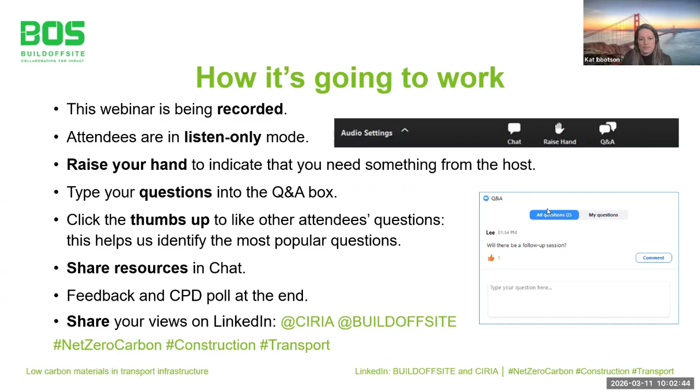Also, a little bit more about CIRIA. For those who aren't fully aware, we recently celebrated our 60th anniversary as a not-for-profit member-based organisation. Our core strength in terms of CIRIA has always been about improving performance through collaboration in the built environment and construction sectors. We do this by delivering independent guidance, such as the Sustainable Urban Drainage Manual, the Rock Manual, International Levee Handbook, Asbestos and Biodiversity Net Gain. CIRIA organises around 30 events per year, mostly online at present, but they range from topical conferences, annual debates and lectures to webinars such as this.

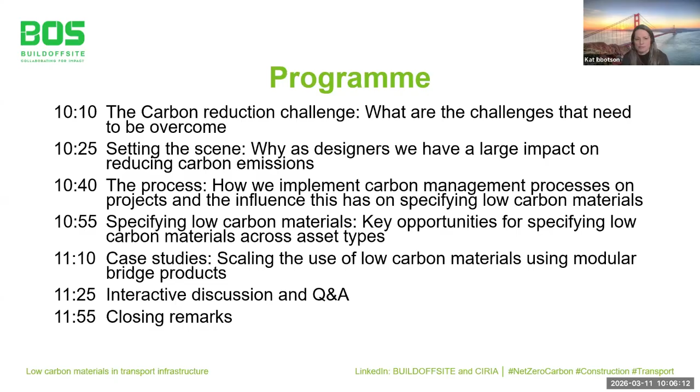Now, our speakers today include Steve Elderkin, who's Director of Environment Sustainability at National Highways, James Kraven, Road Senior Engineer at WSP, Joe Lewington, Chief Environment and Sustainability Officer at Network Rail, Graham Jones, Managing Director at CPro Systems, and Musa Chung, Technology and Innovation Principal Engineer at Laing O'Rourke.

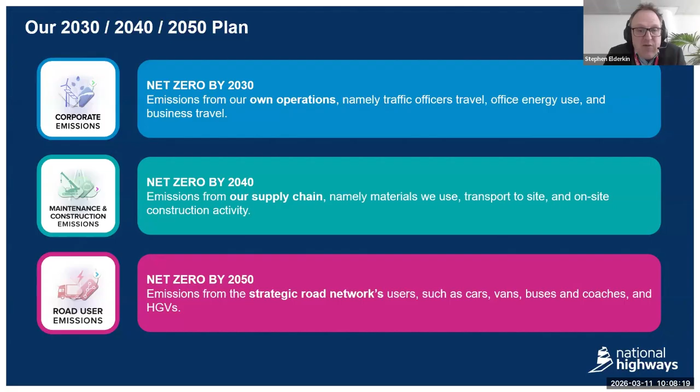Almost 5 years ago, we published our net zero plan in July 2021, and that has 3 headline targets. The first is that we will get to net zero for our own corporate emissions by 2030, which feels quite close now. Second, we'll get to net zero for our construction and maintenance emissions by 2040. Then we would get to net zero for our road user emissions by 2050.

There's a lot going on across the company and across the wider sector, and we very much see ourselves as an important part of this, setting the direction as the client and the infrastructure owner. But this is about changing a system that consists of designers, contractors, material producers, as well as how we operate and maintain the network. We've been making good progress across all 3 targets.

By the end of last financial year, we were down by 70% in terms of our corporate emissions. That's the offices and estates, our depots, our own 1,300 vehicles that occupy the network, that operate and maintain the network. We think that will be getting close to 75% by the end of this year. So we are making good strides towards that 2030 target.

Things we're doing: we've transitioned almost all of our light fleet now to plug-in or hybrid electric vehicles. They will all be moving to fully electric vehicles by that 2030 target date. We've been changing an awful lot of light bulbs. That's actually quite a big project, and we'll be getting towards 70% of our lights being low energy light bulbs by 2027.

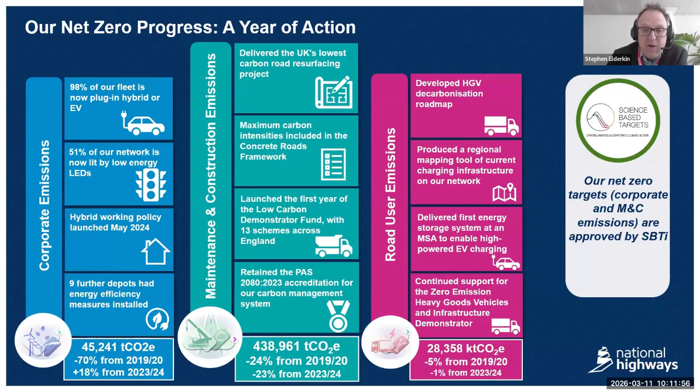So some of the challenges for construction and maintenance emissions in particular: roughly 2/3 of our construction and maintenance emissions are embedded in the materials that we use, and that's very much dominated by the steel, the concrete and the asphalt that's used in the construction and maintenance of our roads.

So we need to work in partnership with those specifying the materials, those manufacturing the materials. We need our standards to allow innovative lower carbon materials and additives to be used on our schemes, and so there's a responsibility for us as the holder of the design manual for roads and bridges, a set of standards used by more than 100 countries around the world, to be agile and to be adapting those to the innovations that are happening.

The performance of the sector will be decided by decisions that are taken throughout the system. So there's a big piece around levelling up people's understanding and awareness of carbon, the opportunities that exist for reducing carbon, and getting thought of carbon into decision making at every level. And we're obviously reliant on supportive policy, regulation and funding from government, who hold some really important levers in this area.

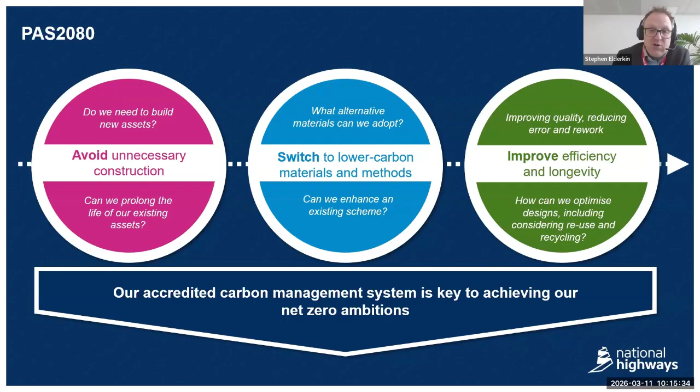And then durability is also important. So if you can extend the life of the pavement, the asphalt, then that's a really sound way of both delivering cost savings as well as carbon savings. It will also, of course, require some innovation around the materials that people are using.

PAS 2080 isn't just for us, and we see it as a key enabler of us being able to have confidence in the decisions that are being taken throughout the system, that the data being reported between our suppliers and ourselves is accurate, that all of our supply chain are either accredited to PAS 2080, or if they are a smaller supplier, that they've aligned to the principles.

We set out in our 2021 net zero plan that we would require all of our supply chain to get PAS 2080 accreditation. And happy to say that now 86% are on the way there, and we're obviously engaging with the 14% who are not as yet making progress.

It is now going to be part of our tenders and our contracting, where you will be disadvantaged as a supplier if you do not have evidence of either having or working towards getting PAS 2080 in your company.

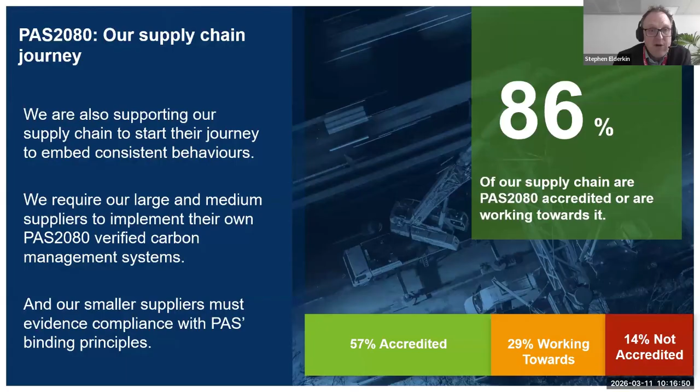We've recently updated our standards to make them more outcome based, to permit the use of more concrete additives that are lower carbon substitutes for higher carbon clinker. We are also changing things like the length of time that you're allowed for the concrete to reach strength. Again, all of this makes it more flexible, more open to the specification of lower carbon materials and mixes.

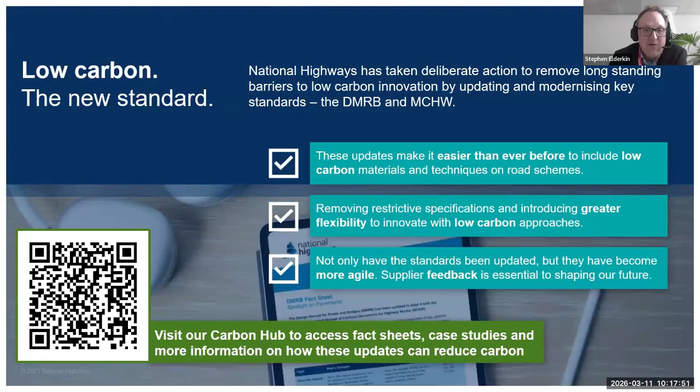And we are open to feedback and the use of our departure system to gather information about other ways that our supply chain want to adapt the materials they're using and to reduce carbon. And so we are compressing the amount of time that it takes to take materials through to being used on our sites at scale.

Transparency, sharing, learning. We set up a carbon hub. More than 1,000 of our suppliers have used this and accessed this. We've made available all of our carbon management system documentation. We've curated a set of resources around low carbon construction.

All of the recording of our own webinars and so on are put up there, and it's all about this idea that actually, just as for safety, where it's too important that we are safe, it's too important that we're reducing carbon to try and make any commercial advantage out of this. If we've got something that works, we want to share it, we want to see it adopted across the sector.

And so we've urged our suppliers to take a similar approach to that they have done with safety, to share what they've learned. And we have a low carbon opportunities register, which has a whole set of opportunities already implemented on some of our projects, so they raise awareness that these opportunities are available, and we require, as our projects are taken through their design and development, that they consider the applicability of these opportunities to their schemes.

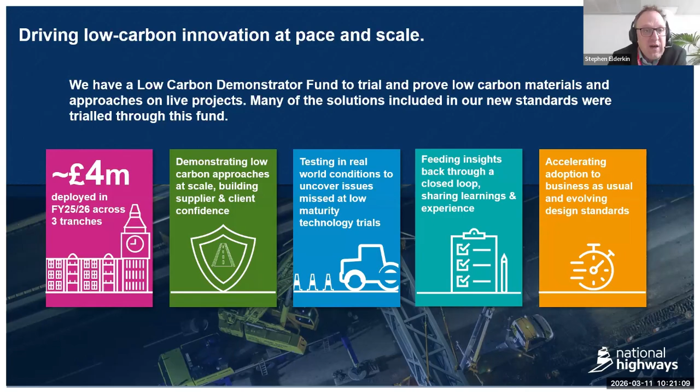We've been using the Low Carbon Demonstrator Fund to fund projects across our network, mostly around asphalt and resurfacing, but we've also been funding plant machinery, concrete, and other ways of reducing carbon on our projects. This gives us learning in the real world about any of the challenges these changes present.

Focus areas: two-thirds of our emissions are from materials, so we need to focus there. We must take a whole life approach, so it's no good saving a bit of carbon in construction if it doesn't last and we have to replace it sooner.

We're looking at things like echelon paving and different ways of delivering surfacing to reduce the number of joints and improve durability. And particularly on trailblazing sites like the Lower Thames Crossing, our biggest project, we're testing the use of electric and hydrogen plant at scale.

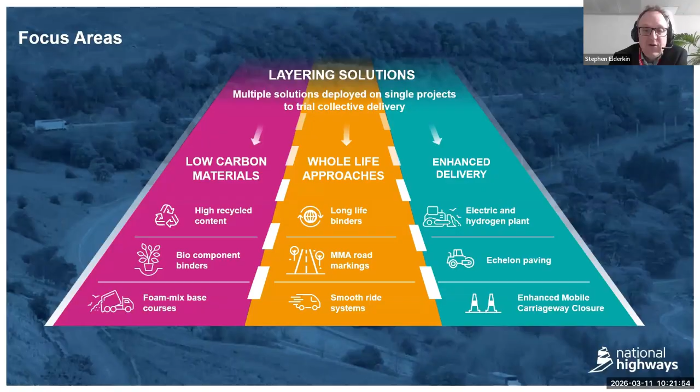An example of one of the Low Carbon Demonstrator Fund projects is a resurfacing project on the A47. Here they used foamed asphalt for the binder course with high levels of recycled content. All the plant and machinery was electric rather than diesel. In total, just on that one project, it saved 600 tons of carbon dioxide.

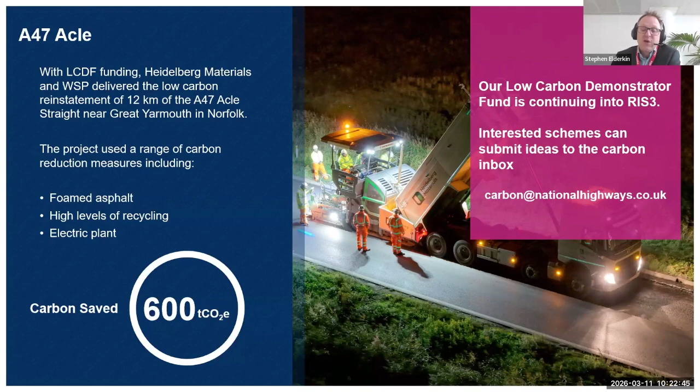This is just one example. We had another project on the A64, run by a different supplier, that achieved more than a 70% reduction as well. So we are starting to demonstrate really deep reductions in terms of surfacing emissions.

Thank you. Hopefully that gives a bit of an overview of the activity happening at National Highways. Happy to pass back to you, Kat.

Right, that's great, Steve. I think it's a real demonstration in terms of the impact a client can have and all of the different layers of approaches that are needed to make an impact. So thank you for your presentation today.

So let's begin with our next presentation by James Kraven, Road Senior Engineer at WSP, who will be setting the scene on why, as designers, we have a large impact on reducing carbon emissions. Over to you, James. Morning everyone.

So as mentioned, I'm James Kraven, Senior Engineer in the Roads team at WSP. I also sit as the Roads Community of Practice Decarbonisation Lead, leading on quite nicely from Stephen's presentation. I've also been leading on our carbon management across the National Highways SDF framework, so I've got direct hands-on experience of working through what Stephen's been discussing.

So to start off, I wanted to run through at a high level how much influence we as designers actually have on the carbon emissions within our projects. As alluded to earlier with the hierarchy and ability to influence whole life carbon, that ability greatly reduces the more mature a project gets. So we really want to be getting involved as early as possible to have the biggest influence that we can.

Within conceptual design, we look into the different design options we have. As we go through design level assessments, we want to look into how we can change key aspects of design to construct less, so avoiding construction activities, and use that to help influence decision making when the option is selected.

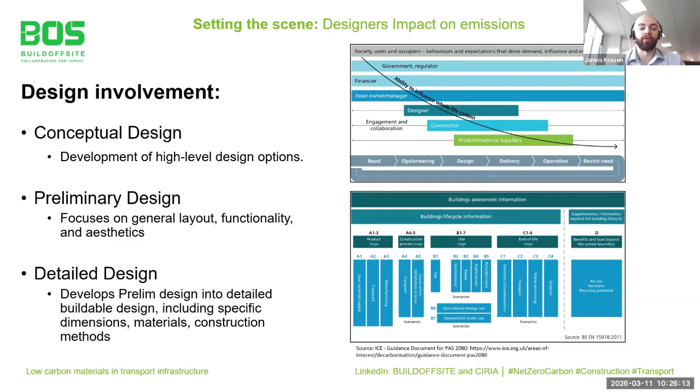As designers, we will set out a baseline at the start of the project. So we look at what the carbon emissions are within the project before we've looked at any measures to reduce them. This is really important because it lets us hotspot the carbon emissions, see where the highest amount of emissions are sitting within the project, so we know exactly the key items that need to be tackled.

Following on from this, we go into a quantification stage of suggesting new low carbon opportunities that we can implement onto the project, having discussions with the contractors, suppliers and the client, and ensuring they are practicable and can be implemented. Then we look into what the effects of this actually are - it's all well and good saying we're going to use a low carbon material, but until we've proved the savings we can get, it's difficult to justify the improvements.

And then out the back of that, we really want to be reporting this through the whole value chain, making sure everyone's aware of what's gone into the processes and how we are managing the carbon, and making sure we have a continuous improvement loop, where if good work's being done on a project, we want to be showing that off to other projects, making it clear these innovations can be taken further and used for more widespread carbon reduction changes.

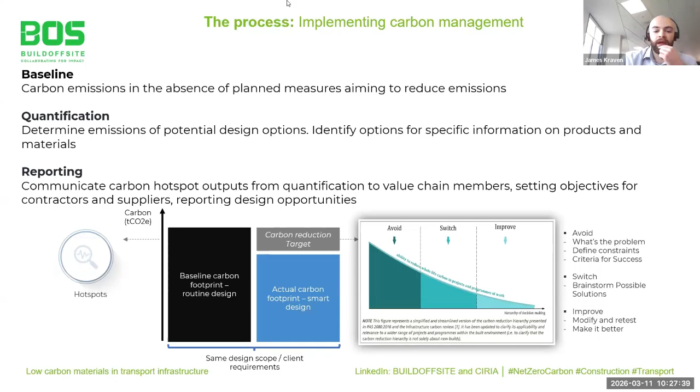As was discussed earlier, the carbon hierarchy is one of the key guidance documents for how to manage carbon and try to reduce it as much as possible. So the avoid action is key, because the biggest influence we can have on reducing carbon is by building less. If we're building less, there's less carbon going into it.

It's about trying to change thinking away from a lot of the time people think, oh, we need to use this new innovative technique or new material. But quite often, the biggest influence we can have is if we just take a step back and think about our design and ask, can we justify changing it? Can we change parameters of our design scope to make sure we are actually building less?

And then from that, we can feed into the switching of materials and looking into those low carbon opportunities, and then going through into proven efficiencies and design processes. I think there's a bigger picture in terms of whole life carbon that's often not considered. This is by no means an exhaustive list, but some of the key considerations we think about when looking into whole life carbon are on the right.

So program implications - are you suggesting something that's going to extend the program and not be feasible within the scope? We need to always make sure what we are suggesting is practicable, but there might also be low carbon opportunities that are actually reducing programs, so then on site there's less fuel use and less of the operations and maintenance side of emissions.

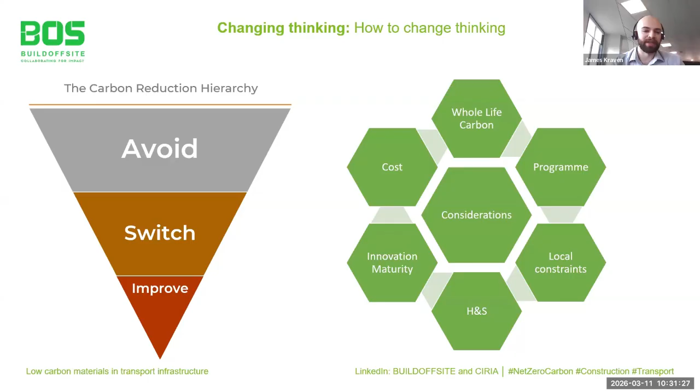I've got a couple more examples of low carbon opportunities we've implemented on road projects, many of which we're trying to push as business as usual activity. Warm mix asphalt and cold mix asphalt is a well established thing, but we're trying to ensure we're developing this on our projects and providing it where possible, along with things such as biobinders, which use biological elements in the binders - if we have large stretches of pavement schemes, this can have a big impact.

A lot of these - road markings on an individual project, for example, when you look at the hotspots, might be a very small percentage of total emissions for that project. But if you look across a framework of projects, things such as road markings and lighting really do add up. If you make a small percentage improvement on a project that's spread across a wide scale framework, you can make massive improvements. It's all about those incremental changes we can bring in.

One that's always flagged up to me is the geotech elements of earthwork. A lot of the time, the geotech team comes in at a later stage when designs have already started to be developed, which limits their ability to minimize the amount of earthworks required - that obviously has a massive carbon impact from sourcing materials, hauling them in, and constructing it. Can we build these considerations in earlier into our design processes, making sure all disciplines are considering carbon from step one, discussing together how we can work to minimize them and incorporate different people's elements into our projects?

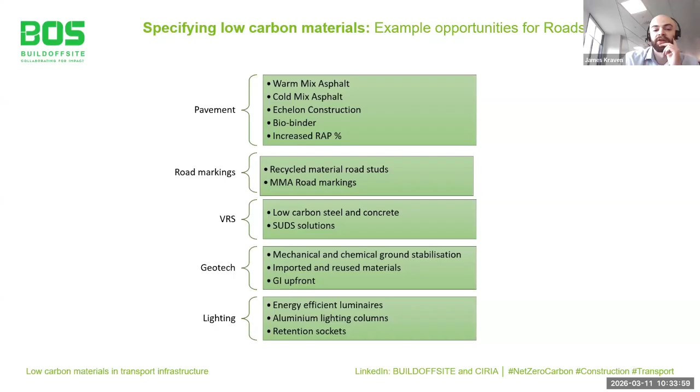Just a quick study looking at M5 Junction 23 Dunball roundabout, where it was a dedicated roundabout cut through realignment works, where we worked with Balfour Beatty and Somerset Council to create a carbon strategy around the project.

As part of this, we baselined our carbon emissions within the baseline design and identified those hotspots. We then conducted innovation labs with the client and contractor, where we produced a long list of opportunities that we thought could potentially be implemented on the project. It was very much about getting everything down on the board so we could then shortlist it.

That was our next step: taking the key items within there which we thought would have the biggest impact, shortlisting those, and then feeding those through into KPIs for the project, where we assessed the carbon savings and validated this through research and case studies.

As part of this, we looked into 10 key KPIs, including lower temperature pavement materials, recycled kerb units, longer life road markings, lower carbon concrete mixes, and reducing the amount of paved areas.

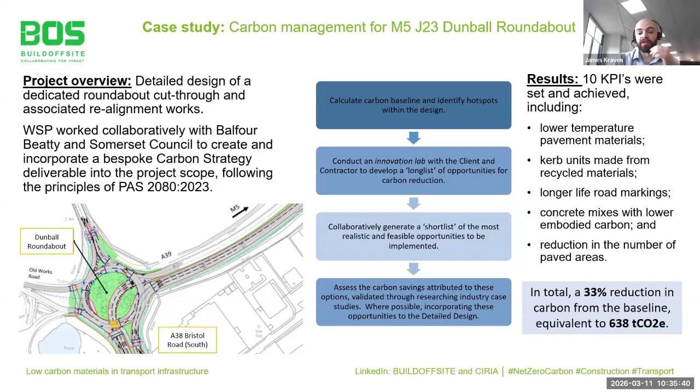You can see this feeds in through all of the avoid, switch, and improve processes into one. As a result, we had a 33% reduction in carbon, equivalent to 638 tons of CO2. You can really see how just switching thinking and considering that hierarchy can lead to carbon reduction straight into the project from working with clients and contractors.

As my final slide, I just wanted a bit of food for thought to get people thinking about how we can change how we're doing things at the moment.

From a strategic approach, as I've mentioned throughout the presentation, a lot of the time people are pigeonholed onto individual projects - they look at what can we do on this project, then they finish and move on to the next one. But if we looked at say a framework of projects, how can we hotspot the framework as a whole and look into where the biggest opportunities are for wide scale carbon reduction to be implemented across a range of projects rather than just on an individual project basis?

It's all about identifying where these trends sit and where wider opportunities we can draw from and build into the projects. Another key thing developed this year is PAS 3090, which looks into climate adaptation and modeling. Could we potentially be looking into more preventative design by doing some climate modeling, looking into where our key areas are that are prone to flooding, and tackling that before the flood events happen?

Into process and measurement, it's all about ensuring that the correct things are measured. We want to be making sure that we are as transparent as possible with our measurements, and that this is fed through into the value chain to make sure everyone's very clear and measuring in the exact same ways.

Off the back of that is target setting. We need to understand what is not enough, what is good, and what is great, so we know on our projects if we are doing enough and if we are pushing towards the net zero targets that we have.

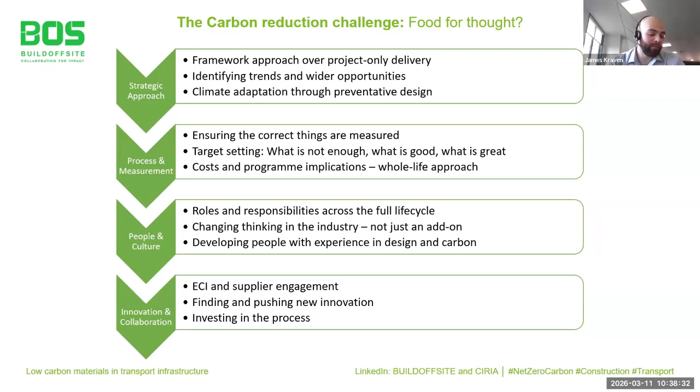And then really it's about investing in that process, investing in the people, investing in finding low carbon opportunities, and then pushing those. So thanks for listening, everyone - that's me, I will pass back to you, Kat.

That's great, James. I think that point about integrating carbon and understanding into existing disciplines is essential.

So it's not seen as an add-on, but a core part of delivery. Great point there, so thank you.

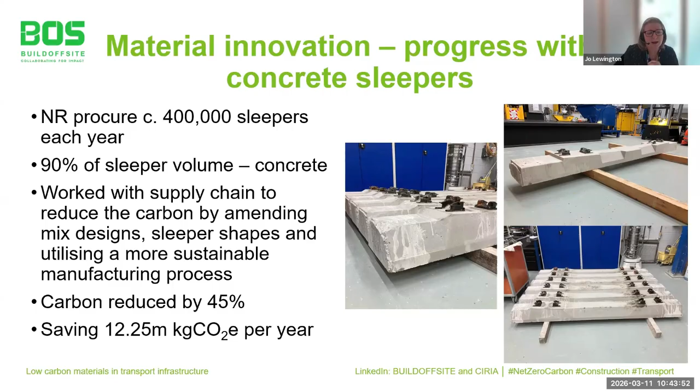So if I go on to the next big ticket item, as I call them, of what we use in the railway, that is rail, and specifically steel. We purchase about 80,000 tonnes of rail every year. Through our new rail contract, we've been able to mandate that a portion of this must be low carbon rail produced using an electric arc furnace.

And that uses recycled scrap metal and renewable electricity. So essentially this gives us 62% lower carbon compared to traditional steelmaking.

Around 20% of our total rail volume now comes from this new low carbon source. And I know it comes from Europe, so that is still a challenge, but transporting it by rail means it is still fairly low emission. It is a more expensive product at this point in time, costing around £70 per tonne more, but the carbon benefit is significant. Ultimately what we're wanting to transition to is a more resilient supply chain in this space going forward.

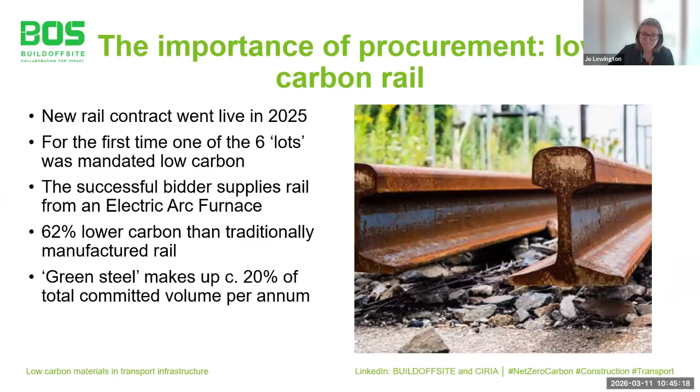That's rail. The final item I wanted to cover off was ballast, and this one I feel is really quite exciting. Through testing with Southampton University, we discovered that we could actually safely mix used and virgin new ballast together to create a 50/50 blended product that meets all of the requirements that we need it to.

The benefits from that are pretty amazing - just over 600,000 tons of virgin stone saved each year, 1 million kilograms of CO2 saved annually.

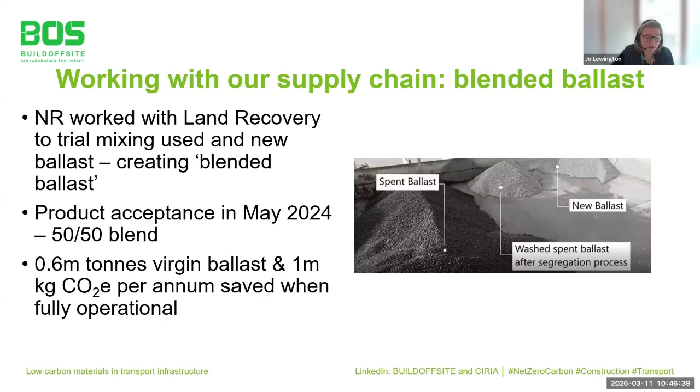This was as a result of quite rigorous product acceptance, as you would imagine, and that was achieved in 2024. It's being rolled out across the estate now, and with a new tender coming online in 2027, this will become available more widely across the whole of the UK, making it the norm rather than the exception, which it has been in years gone by.

Just summing up, these are some examples of the key materials we use. We use thousands of different types of materials, and we know our biggest challenge is scope 3 - what sits within our supply chain primarily. We can't do this in isolation as a client; we need to work with our supply chain on tackling the circularity and carbon aspects of these materials. But it's really exciting to see, just using these three big ticket items, what we're already doing.

I think there'll be further innovation around sleeper design to cut carbon from materials even more. As I said earlier, there's a UK-wide ballast tender underway, which hopefully will bring further investment into regional processing and blending facilities. And then, depending on how the UK steel sector evolves, there's an opportunity most definitely in our supply of rail there.

So it's all about closing the loop so that more materials that we're using can flow back into manufacturing rather than go off to landfill or disposal. And each of these helps us reduce carbon, improve resilience, and reduce the whole life cost.

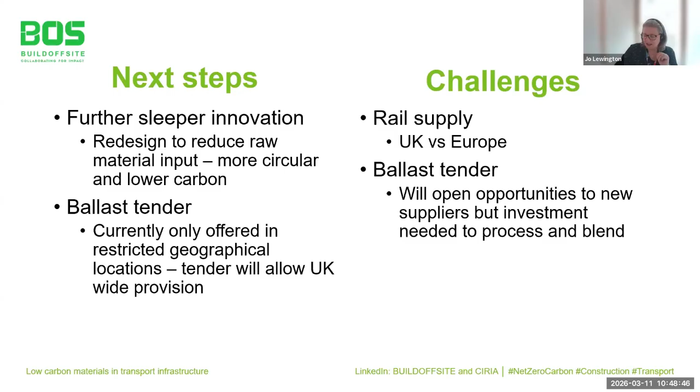When we talk about decarbonising transport and infrastructure, people often think, oh, it's these big, shiny, big ticket innovations. But actually, what we've just demonstrated here is that we're quietly in the background, innovating the fundamentals of how we're tackling this collectively, both as a client and with our supply chain in partnership. I think that is my final slide, Kat, and I will hand back over to you.

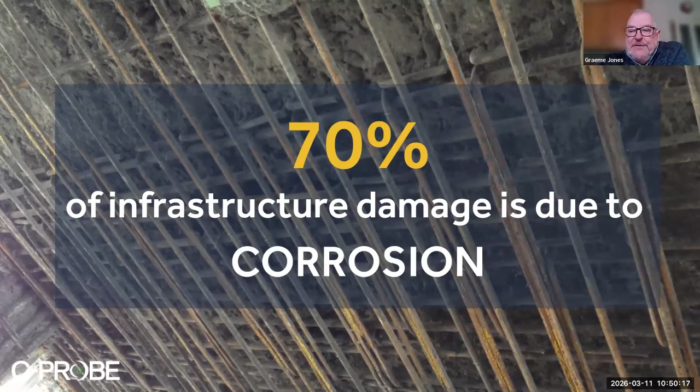Specifically, I'm a corrosion engineer, a fellow of the Institute of Corrosion, and a CP specialist. The biggest issue for infrastructure is probably the one that's closest to my heart, therefore: 70% of infrastructure damage is down to corrosion. Of course, other things can happen to structures, but corrosion is a very big issue, and it's a changing landscape. We have a lot of structures already built - I think the tagline is that 95% of infrastructure already exists.

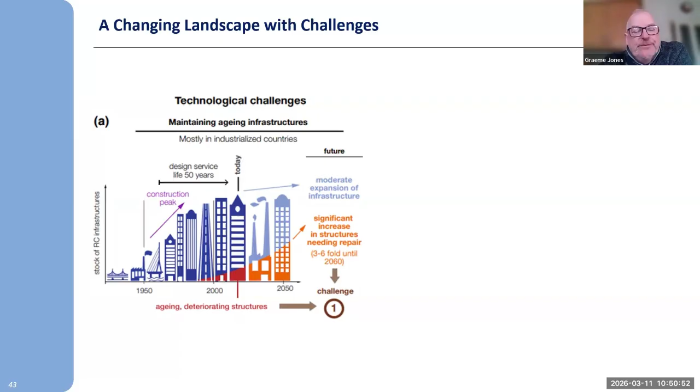We're topping it up with the occasional new structure, but we have a large stock of aging infrastructure that needs to be maintained and looked after. This particular paper demonstrated a 3 to 6-fold increase in structural repairs likely to be needed as we approach 2060. So a lot of lost material and a lot of new material being used, and of course we've got to look after what we've already got.

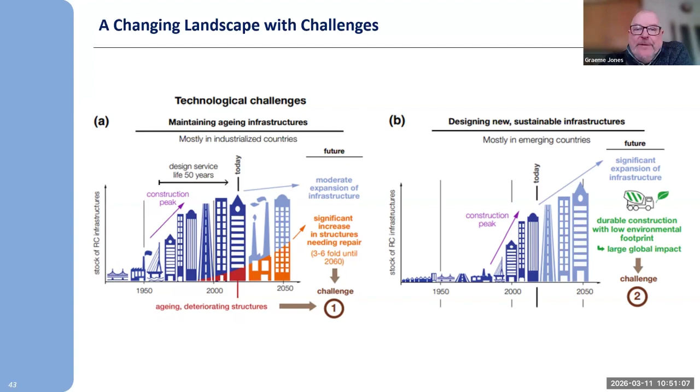There are steps we can take earlier, of course—probably the subject of another day—building in resilience from new is also possible. Once we get to the end of resilience or end of service life stage, we basically have two choices: we can either demolish and, having demolished, try to recycle some of that material, add it to new material and build again—but some of that will be disposed and wasted. So we've lost a lot of embodied carbon.

What challenges us in our business on a day-to-day basis is how can we take that built structure and repair, repurpose, and make it last longer. Now that inevitably will also take some new material, but retains an awful lot of the structure that's already in place, with a key factor being: the earlier we can get in, the better, because we're allowing the disrepair to be minimized—so using less material to repair and carry on.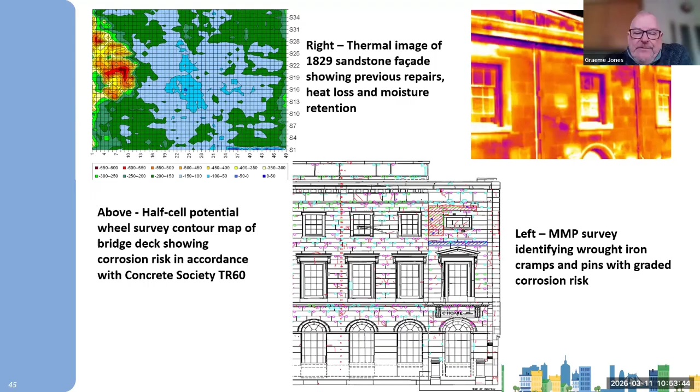So having identified that issue, we can develop a strategy. We know the condition, we know the intervention is needed, but there are other factors to take into account—not all of a structure needs intervention at the same time. In some cases, if you take the example of the bridge deck again, some of it is actually still in good condition, so intervention would not necessarily be required straight away. And certainly a leap into demolition would be pretty silly.

So levels of intervention can be dictated by the condition assessment data achieved, both in terms of environmental impact, chemical attack, chlorides, carbonation, and what its current risk is. Bear in mind, a half-cell potential map is not telling you that corrosion has propagated—it's telling you what the risk is in thermodynamic terms, and gives you time to meet those challenges and develop a design strategy to intervene.

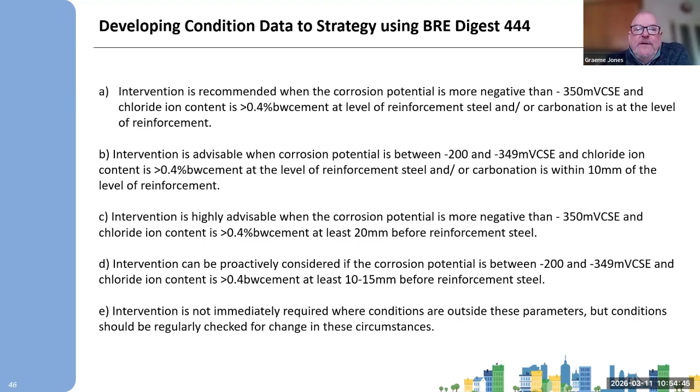So having decided to intervene, we also have fairly mature standards. EN1504-9 is a very mature standard now for mitigation design choices, covering 11 different principles. They're primarily trying to stop the ingress of moisture and the ingress of accelerants like chloride and carbonation.

Once in the structure, of course, we then want to be able to control it. So we have choices on control—we could do surface treatments, cathodic protection, galvanic systems, chloride extraction. All sorts of techniques and mitigation choices are out there to try to alleviate the problem.

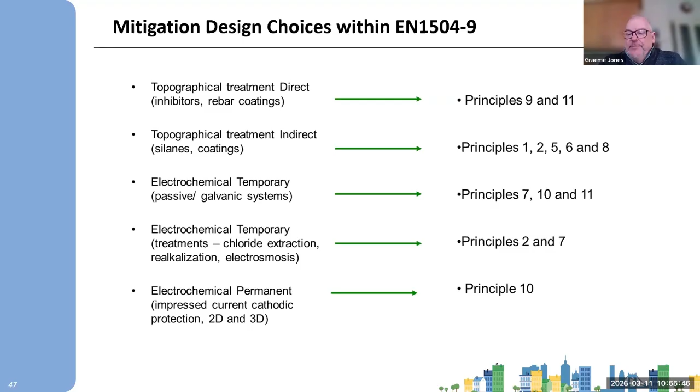And it's also a hold point—what materials are we going to choose to achieve the principles of service life extension when we come to remediate that structure? There are systems coming on board now that allow us to decarbonize some of the materials being chosen.

In our case, these come with our LoCem products, which have independently verified Type 3 EPDs, verified by BRE Global, which inform the engineer during the design process of just what those materials are achieving in terms of carbon reduction and environmental impact. Of course, doing the LCAs on these is more than just CO2e, and can inform on other features such as contamination of marine and the likes. So we have our EPDs for the repair materials themselves, but I would highlight that we've also done the calculations for the EPD for the whole of the cathodic protection systems - not just the anode system, but the monitoring tools, cables, cable management, power control and monitoring electronics. All these are part of that carbon footprint and need to be assessed, and this EPD does do that.

I think the challenge for EPDs comes in - and we had this challenge while debating the data with BRE - particularly in cathodic protection. Cathodic protection is in place to extend the service life, and with control and the right materials, could potentially control those issues indefinitely. So to get to the circularity question on landfill, recycling, or removal of the structure at the end starts to get a little bit more tricky, because there comes a point where you say, well, service life can carry on. Whereas the corrosion's under control, the structure itself is intact, it's still got structural integrity - at what stage does it ever need to be demolished? I think EPDs need to develop that knowledge base in order to properly assess that Scope 3 circularity.

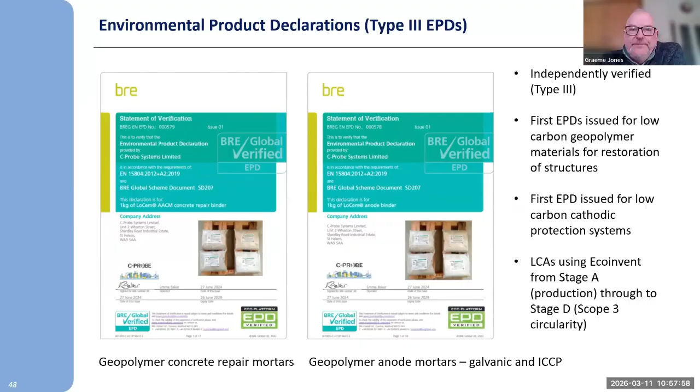So in our case, we achieve these low carbon credentials by repurposing waste materials, by not using heat, just repurposing waste powders, blended into geopolymer formulations that allow us to repair, build, and also, in terms of a very specialist formulation, allow us to use that binder to create a mortar that could conduct and be in itself a mortar anode. And that's a bit of a game changer.

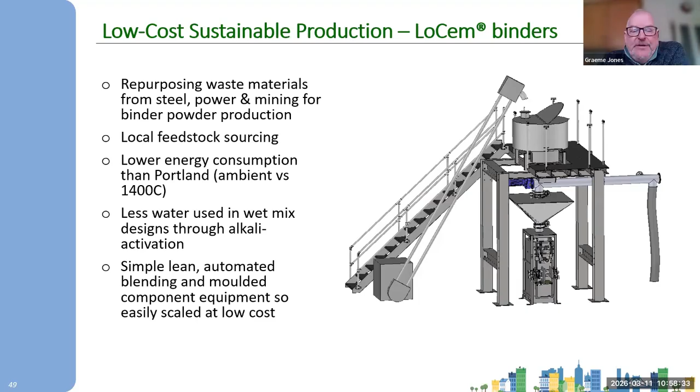So those features of geopolymers being low carbon are also comparable with normal mortars and concretes in terms of compressive strength, improved flexural strengths, very little shrinkage, very highly thermally stable, cures at negative temperatures, and can withstand fires to 1200 degrees for 5 hours. Very highly resistant to sulfate. We've had this independently assessed by the BRE under an Innovate UK programme, and acid resistance out in the Netherlands and the water industry, where the geopolymers have withstood pH 1 sulfuric acid vapor for 3 months without change. And we are very proud to be top of the class there.

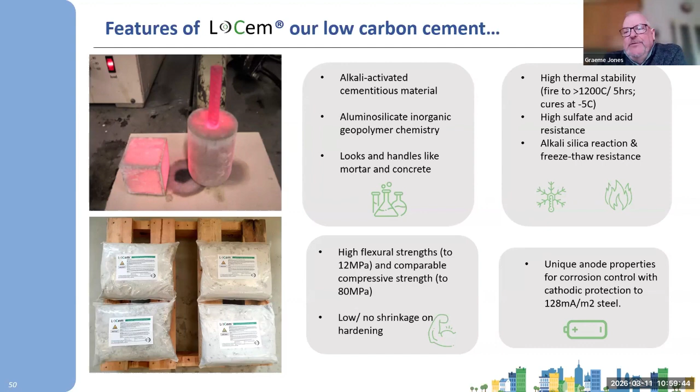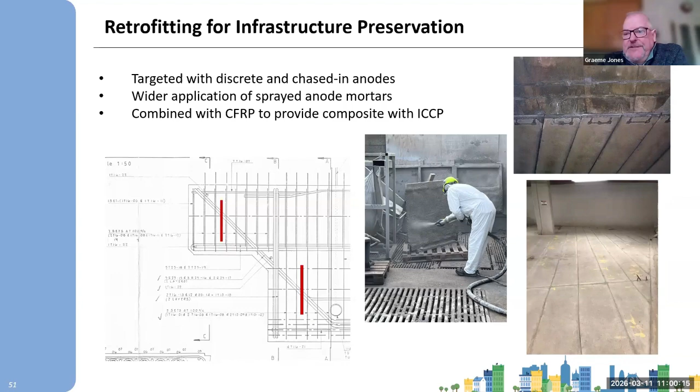But the unique anode properties allow us to take control of corrosion, and very high current densities are possible before acid is actually generated. So there's lots of technical features and reasons to embrace different cements to create that low carbon, sustainable, resilient capability. And retrofitting is normal - you can target it by drilling into complex steel areas like the half cell, the half joint you see there. You can spray it - we're very pleased to see that spray go in with very little rebound and mess, which is good news. Or you can cut it into decks and control corrosion based on the steel configurations deep within the structure. So infrastructure preservation is really just done normally, just with a different material.

On a case study - and I apologize for it not being a transportation one, unless you can count bikes that run over the top of these podium decks - this is a very large podium project in New York City, the Bronx, that we're doing at the moment for threat protection. We have 40,000 square meters of 3 different podium decks. They unfortunately have to remove 18,500 square meters of that to a depth of 600 millimeters to then be replaced, and that is simply because they didn't catch it in time and allowed it to develop into a major problem. So, of course, there is a loss of CO2e there, and we calculate that based on IStructE's little cube that takes into account all features to make a cubic meter of concrete. So a loss of 3.9 kilotons of CO2e due to that slow decision making. But then retrofitting impressed current cathodic protection to the other 21,500 square meters will save the other 5.5 kilotons.

New material added in there is negligible because of the low carbon nature of the materials, and that's good news for the project. Having completed thorough protection of 40,000 square meters across the whole of the decks, there's no further loss of CO2e, preserving 10.3 kilotons of CO2e. It's all data-driven and remotely controlled to assure performance to international standards into the future.

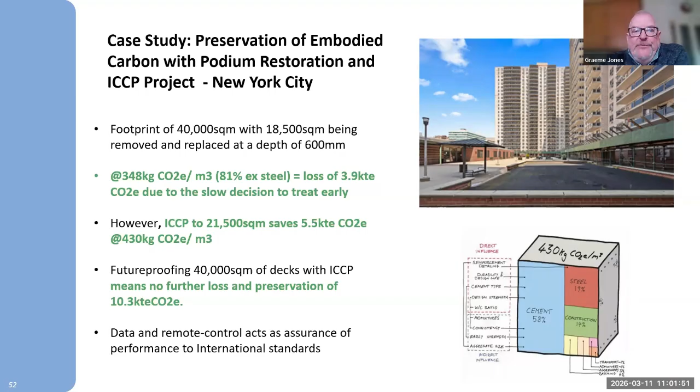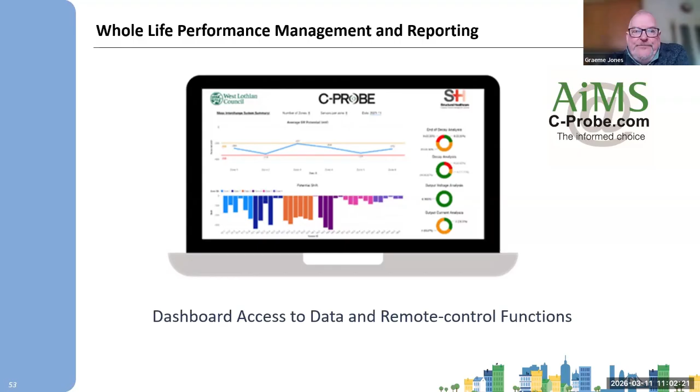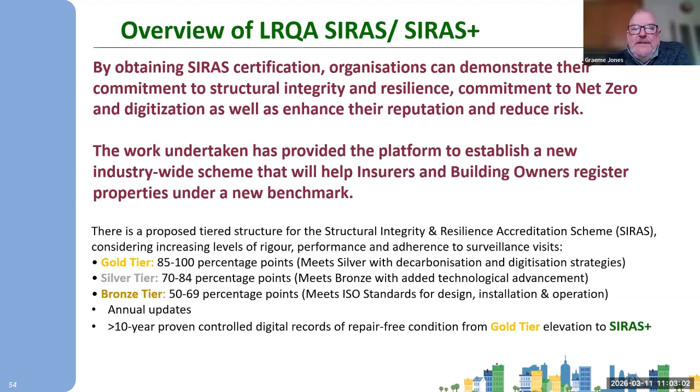I would encourage you all to contact LRQA and find out more.

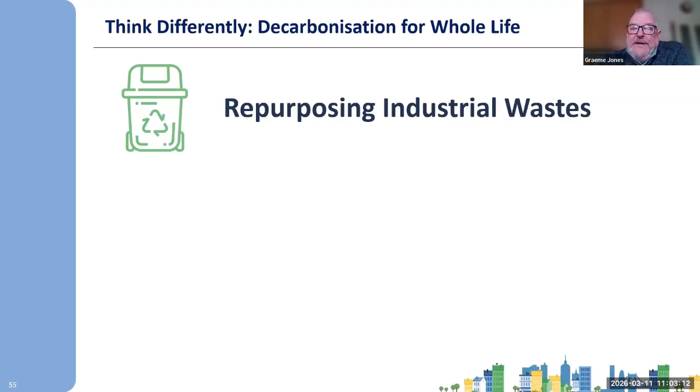So our closing statement would be to think differently. We can decarbonize for whole life by repurposing industrial waste to look after our structures, securing that embodied carbon that's been invested initially, but with sustainability, with built-in future-proofing and control.

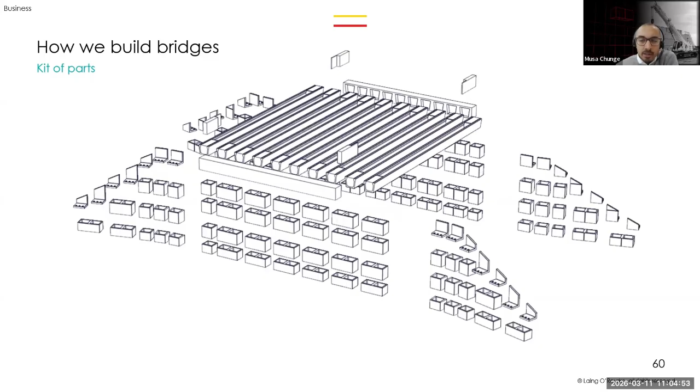My current space of work is really in infrastructure, mainly transport and grid infrastructure, but today I'll be talking about what we're doing in the bridge space. At Laing O'Rourke, we have a product-led approach to how we construct bridges, which involves us manufacturing some of the components, particularly around the substructures, but also integrating components from the rest of the supply chain to provide a complete solution.

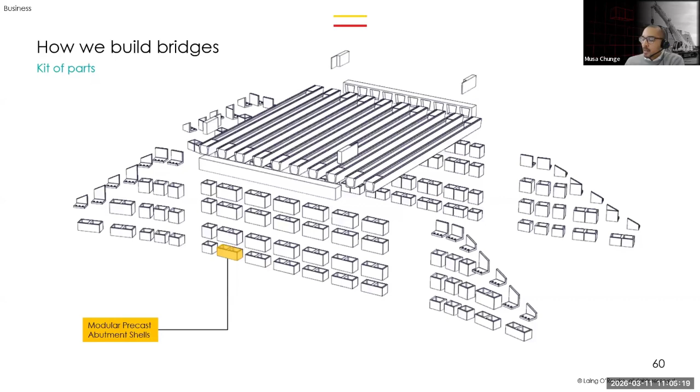One of the key elements of the way we build bridges is what we call a modular precast abutment shell. It's a cellular element that is non-participating but stays in place for the whole life of the bridge, a concrete piece that stacks very quickly, has integrated temporary works, and really unlocks a new method of construction.

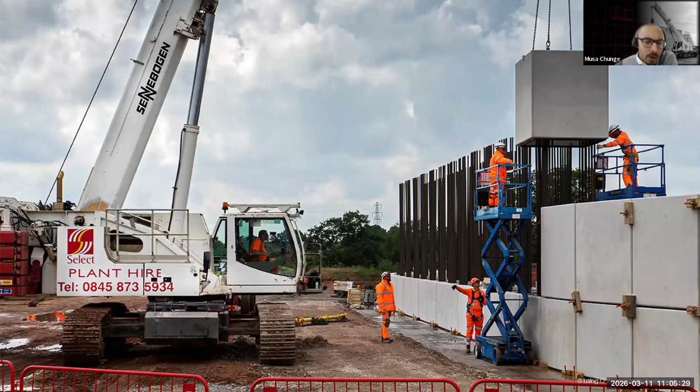We've been deploying bridges like this with significant repeating benefits, which is something I find really encouraging. Wherever we go, whatever requirements we shape the offsite solutions into, we get to see similar outcomes - a significant step change in on-site productivity, where we've gone from traditional methods to clean sites with small specialized teams putting in structures with 60 to 80% less effort or less time on site for those elements.

We're seeing rapid acceleration in programs, with benefits coming from reduced prelims. That often drives cost savings, especially in really congested sites, really disruptive areas of construction, which we often see for bridges. And we're seeing improvements in waste.

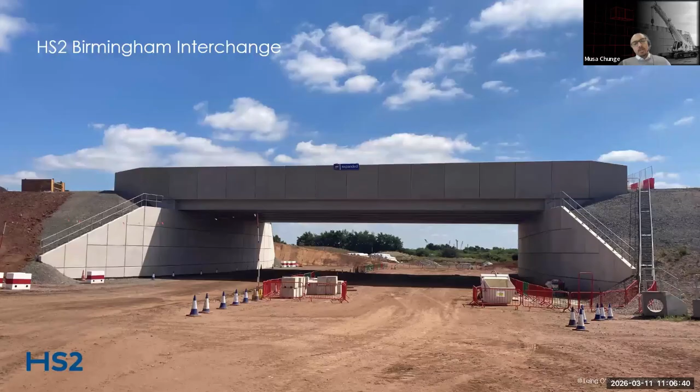The predictable method of construction brings a lot of continuous improvement and learning. The average values for waste on our schemes around concreting, for example, is coming down by 90% for some of these elements and the substructures we're deploying them on. Really good outcomes - that picture was an abutment, one we did on the HS2 Birmingham interchange scheme. This is now almost 10 years ago, and we've deployed about 20 structures with this methodology.

Some of the more recent projects have been on very significant infrastructure in the UK, at the M25 junction 10, where the A3 crosses the M25, where we've done 8 structures down there.

As an example of how those benefits keep coming, we had a request from the two big airports that consider this a critical route, Gatwick and Heathrow, to move a closure earlier in the program because they were worried the bridge construction would be too disruptive. Because of our methodology and the way we were able to deliver, we brought that closure earlier in the program, which is rarely something you hear about in construction, and delivered it on time to plan with the outcomes I've just mentioned: productivity benefits, construction benefits, reduced impact on traffic management, durations and schemes. We're doing more and more of this.

Our biggest scheme at the moment is on the M42, where HS2 crosses that big section of motorway. We're rapidly deploying our solutions, and they're shaving off a whole year off the program.

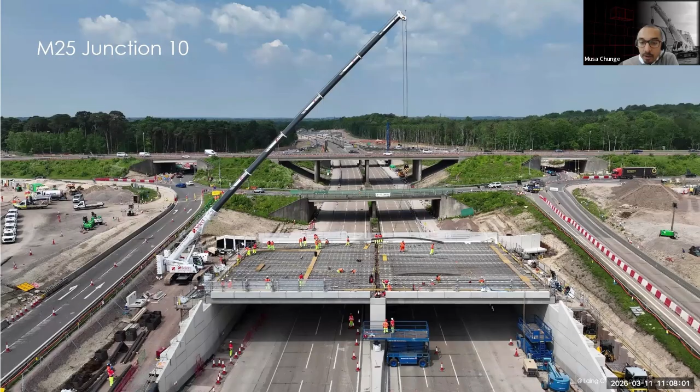Now, if we look at the A1 to A5 stages of our approach, we've done a detailed case study on that HS2 bridge that I showed. We did a like-for-like, fully designed traditional equivalent to the modular method we used, measured it up to the level we would execute in construction, and developed an A1 to A5 measure of the embodied carbon. We shaved about 4% off the embodied carbon in those stages using the modular approach, a lot of that driven by construction efficiencies. Material is probably about like for like, with a couple of things going down and a couple going up. So we're at least as good as traditional methods, but we're unlocking all these other benefits.

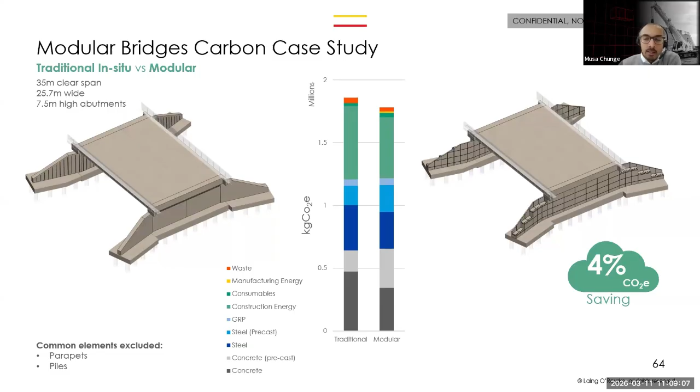So I took that as a challenge to say, okay, we found a methodology that gives us some really strong repeating benefits, but how can we do more? How can we get better with carbon? One way is to look at the materials we're using in these systems. Separate to bridges, more generically, we've been trying to find opportunities to bring alternative solutions and materials into our manufacturing processes, embedding those into products and creating pathways for them with high technical and manufacturing readiness, at the right commercial positions where we believe these things will be cost competitive.

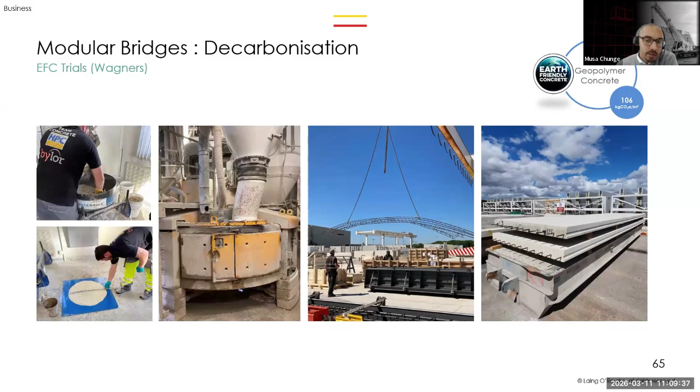So we've been looking at, one example, a geopolymer solution developed by Wagner's called Earth-Friendly Concrete, and how we can bring that into our manufacturing products. In parallel, we've also been looking at basalt fiber reinforced polymer bars. One of the suppliers we've been working with is Bastech in that space, but there are others in the market.

These materials have interesting opportunities. The geopolymer concrete provides an alternative binder solution that significantly reduces the carbon content of the concrete itself. The basalt reinforcement provides an alternative to steel reinforcement, which in tensile capacity is significantly stronger than steel. It's also quite a lot lighter than steel, but it does have some behavioral nuances that impact your design. Done well, that can also bring significant savings in carbon. An example is in particular elements, we're seeing almost a 90% reduction in the mass of reinforcement by bringing in these alternatives, which also has knock-on effects in terms of the type of work required to fabricate these solutions, and it's also a lot easier for the people working and fabricating these elements.

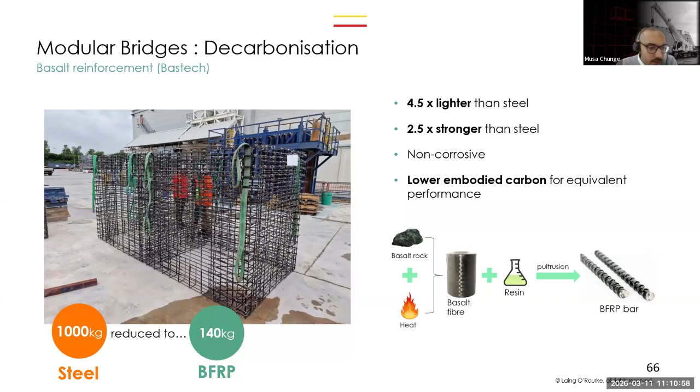So we've been looking at embedding these products into our technology, into our production systems, and taking particular elements into testing and trialing. Quite a bit of investment has gone into finding the right products and the right avenues to deploy these products in, and demonstrating that they actually work.

So we have the engineering theory, but do we have the physical evidence that demonstrates that theory is actually repeatable and can be deployed accurately? We've been doing work with these materials individually, a progressive adoption of them, and also in combination, to test our engineering theory and have a controlled deployment mapped out. We've been doing structural testing at the BRE, and starting to look at how we create the pathways into project deployment with these elements with the right levels of confidence.

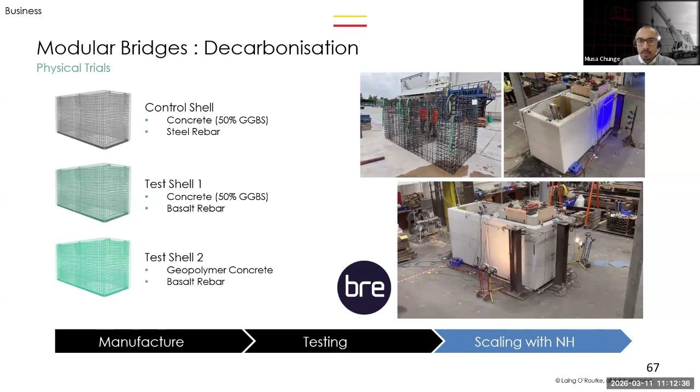But we found out that we could only get so far on our own. So we began to then congregate with a partner in Ramboll on the design side and with National Highways on client side to actually bring together an aligned effort in this area to actually define the pathways into the market.

And we found that we did share ambition. I think this is an important thing to recognize, and a day like today is also quite good. The shared ambition to decarbonize exists, which is good. We can form a common goal towards that.

We found that with these bridge elements that we produce, there's enough of a pipeline to actually target innovation towards, and have a repeatable system, a scalable system with a variety of risk profiles, and I'll come back to that a little bit more. And we can build on the existing MMC benefits.

So we saw this opportunity with the offsite approach to actually come up with an integration pathway that was controlled but had enough of a pipeline to go on a journey with.

We all recognize that scaling is hard, and the supply chain does need support here. And I think it's important for the client to be involved in these conversations, and contractors like ourselves to be involved in these conversations, and designers as well, because we all interact with the supply chain in various forms and ways, and we need to pull in the right support and enable the right signals to the supply chain that there will be a pipeline.

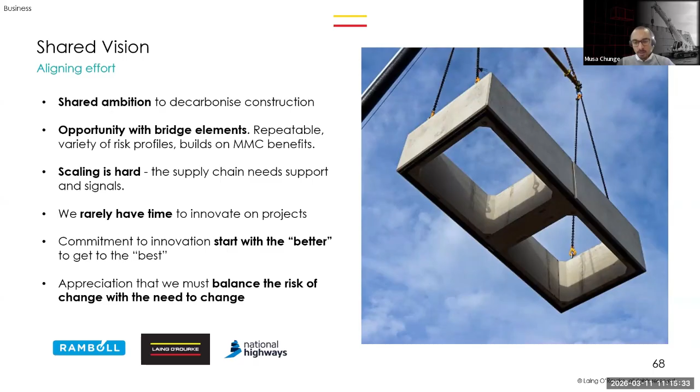So coming back to our shared ambition to decarbonize, we have to get to that, but we have to balance how we do that with as little risk as possible.

So what we're doing, following on from the progress we had made with exploring materials, establishing a manufacturing and technical readiness, we then applied for funding to National Highways, and this is just going back to, I think, the first presentation we had today. It's very helpful to have clients that are investing and supporting research and innovation into new areas.

That funding is really about creating a phased approach to deliver value. So we're not trying to do everything at once. We're creating a phased approach to integrate new materials incrementally at the right risk profiles and create pathways for suppliers and designers to be able to adopt these things early without having to try and do everything in a project context. So we're developing generic content.

In the national highways space, this is developing the generic departure content that will allow specifiers and designers to be able to understand what would be required of them, and create a very clear process to adopt particular types of novel materials for particular use cases.

So we've created a kind of hierarchy of risk, and we're creating a clearer set of requirements alongside the risks. For example, if you're in temporary works, you might not need to satisfy the fully fledged requirements for all your materials. If you're in a permanent but non-participating element, you might have a certain additional level of criteria. If you're in a fatigue sensitive element, you will have a much more onerous set of criteria to demonstrate.

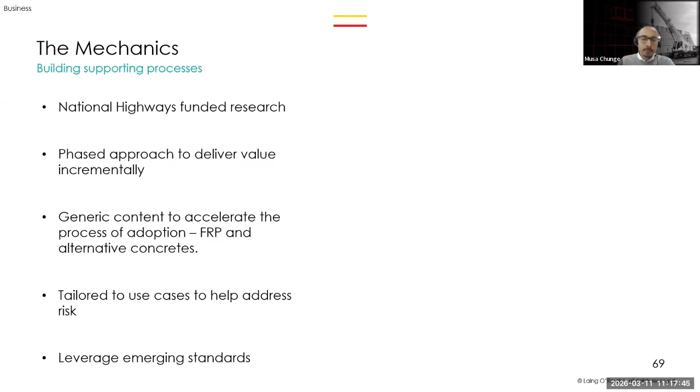So what we're doing is developing, in the first phase of research, a basalt fiber reinforced polymer bar structure of departures. This is a generic design departure - how do we approach design using this material? And then a material specification departure is how do I specify this material for the right risk profile. So phase one will be how do we create the generic approach - it'll actually be for FRP materials in general, but with basalt as an example of how that works.

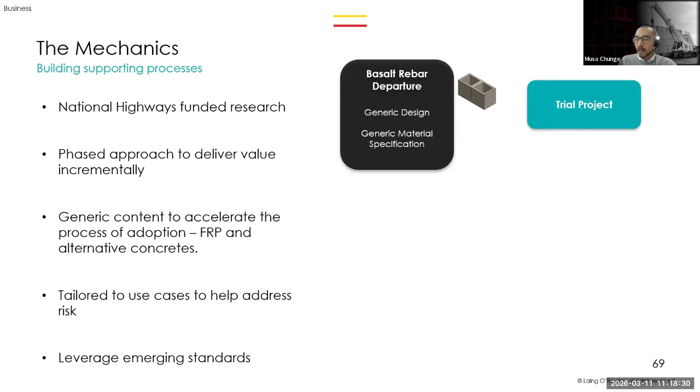And we'll start with non-participating elements with the bridge shells. Phase one will then allow us to start feeding that into trial projects. And I think our hope and aspiration is that we'll be able to get that into the Lower Thames Crossing framework, where we have a significant number of bridge structures.

Second phase will then focus more heavily into the alternative concrete solutions, so things outside the realm of the BS 8500 series of specifications and standards, and will again form a generic design departure and a generic material specification to national highway standards that allow users and specifiers to be able to identify the right criteria and evidence that they will need to provide for a material to be evaluated and assured for use in the highways context.

And again, we'll start that with the lower risk elements, and then progressively as we go forward, move into higher and higher risk categories and develop testing and evidence basis for how these materials will be scaled. And we're expecting that projects will come along as we go further.

And we'll also, in the second phase, start to look at what do we need to do for the combination of novel materials. So it's easier to handle one introduction at a time, but we'll also be developing guidance and generic content around how do we bring two different novel entities together and make sure that the combination of these materials doesn't introduce unknowns that we aren't able to manage and control.

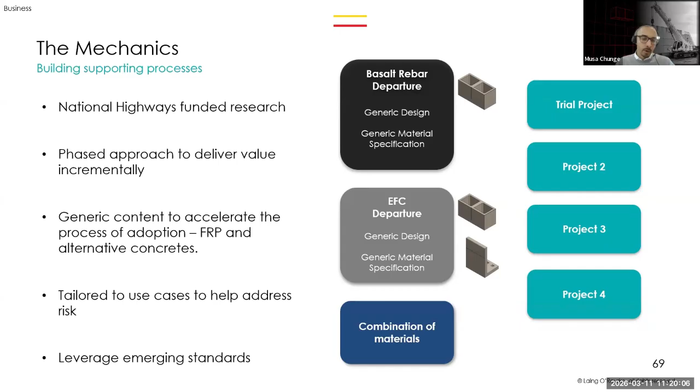As all that goes along, we need to be drip feeding into projects to get early value in. So again, we won't figure out everything in one go, but we'll get better before we get to best. And this mechanism will really help, we hope, to facilitate sending the right signals to the supply chain.

And that's coming back to the signals. Our ambition is we want to give process clarity - how do we get new materials in at the right risk profile with a balance of the need to decarbonize, but also the need to control and manage future use and operation and maintenance of these assets.

As we give requirements clarity, that will send the right signals to supply chain. So if you imagine a new innovator coming in, trying to develop a new material, if they have clarity of the pathway that they need to get that material deployed in, that can help with that early development and testing and evidence base that needs to be generated to provide that approach.

The requirements clarity also takes pressure off project innovation opportunities, where projects can then be starting from a position that is 80% of what would have been typically done to 100% on a project, because the content exists, and all we have to do is then shape it to the specific entities and elements that the project will need. So it becomes a much less onerous task for projects to follow a process to innovate and adopt novel materials.

We'll also be providing evidence and examples through the work we're doing, which will be good case studies and reference points for the industry to say, okay, it is possible. We can do this. We can deliver change in the right way, and we can work together collaboratively to do so. And importantly, we will then start to see the benefits and the impacts of doing things differently, and that will help to unlock even more carbon savings from what we're currently able to do, at a faster pace.